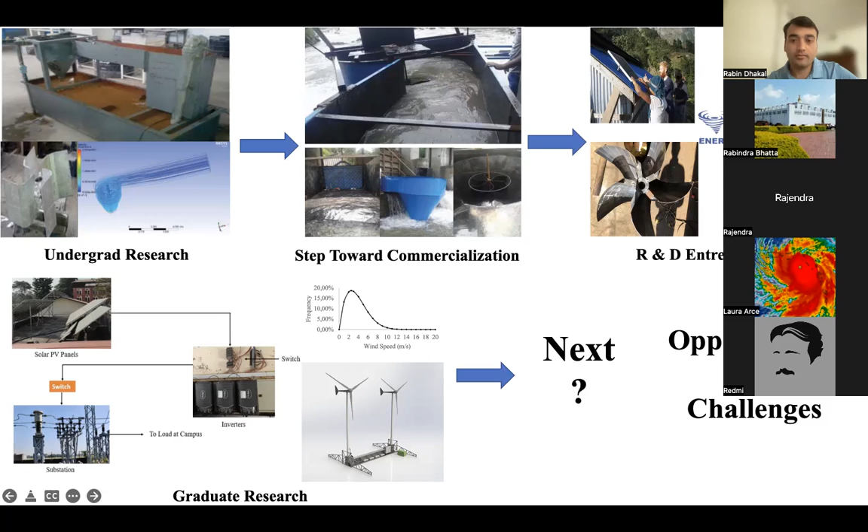Okay, so let's discuss what a micro hydropower system is. This micro hydropower system is also a distributed renewable energy system because it is typically off-grid in nature. We have to form our own transmission line, power and control system, all other things we have to make our own. That's why we can say this is also a distributed renewable energy system.

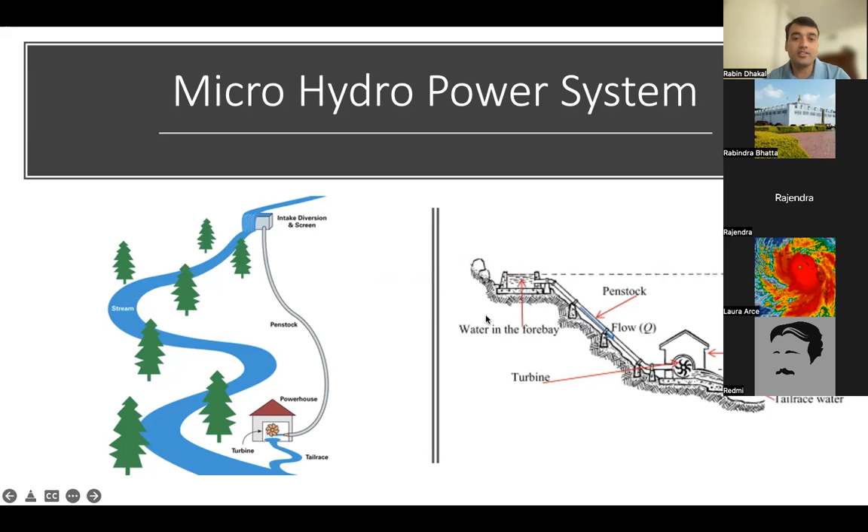So I work on this micro hydropower system, but not what we saw previously.

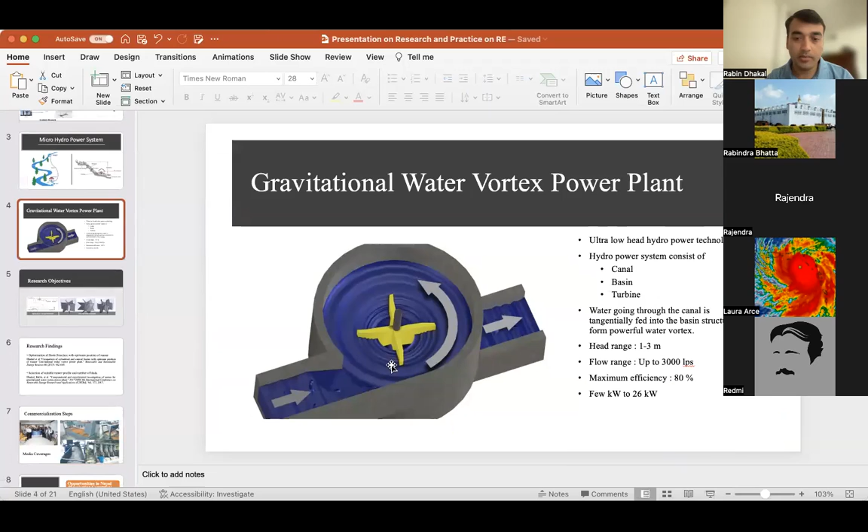Okay, so I work on this gravitational water vortex power plant, which is a micro hydropower system. It is an ultra low head hydropower technology. Typically, micro hydropower systems require head up to 25 meters, up to 100 meters. But for this system, we only require 1 to 3 meters of head.

It consists of canal, basin, and turbine. This round structure is called the basin. And this one, where the water flows, we can say this is the canal.

At the center of the basin there is a turbine. Water going through the canal is tangentially fed into the basin structure so that a water vortex is formed. This vortex is strong enough to rotate the turbine, and we can extract power from this rotating turbine. So here the main source of power is the water vortex, not the head.

Typically in other micro hydropower systems, head is the main source of energy, right? Where if we have some head difference, due to the gravitational force and flow of water, energy would be extracted. We know the common formula rho Q G H, so from that the power is extracted. But here, the main source of power is not the height, it is the water vortex, the strength of the water vortex.

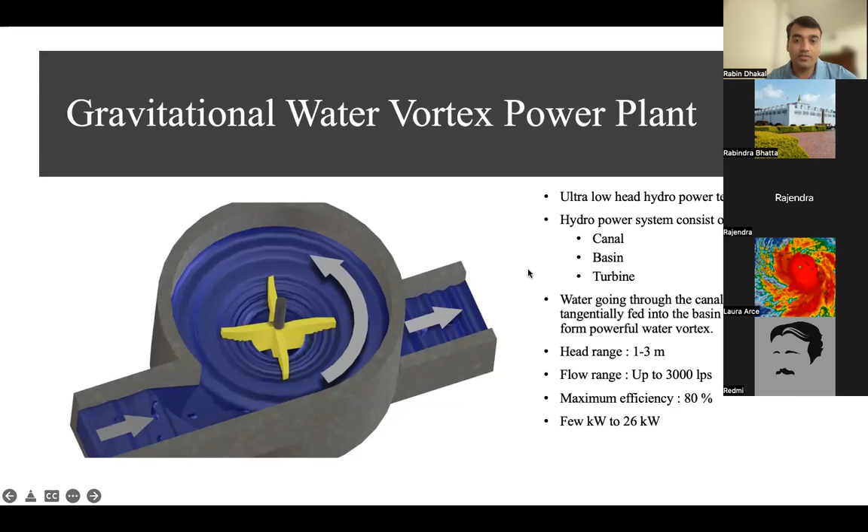So my research objective in my undergrad was to optimize the design parameters of the turbine. Here are some geometrical parameters we can see. The second objective was to select a suitable runner.

This is a new technology, introduced in the world in 2007, so there had not been much research at the time. In 2013, when I worked on this project, there had not been much development in this field. That's why I worked on optimization of design parameters and selection of the suitable runner.

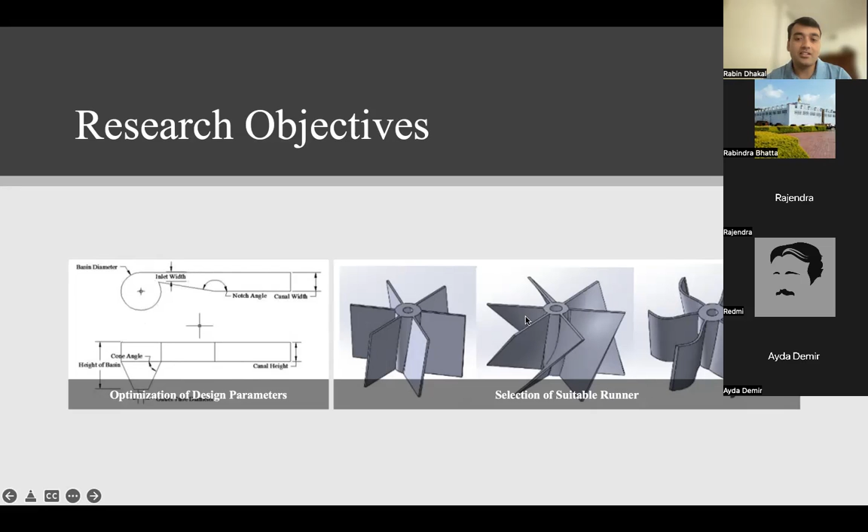The major research findings I made can be found in two of my papers. One is a journal article in Renewable and Sustainable Energy Reviews, and another in a conference paper. In the first paper, I found out...

the optimum basin structure. Previously a cylindrical basin structure was used for production of the water vortex, but I proposed using a conical basin structure for formation of the vortex. This gives much greater vortex strength so we can get more power from the hydropower system.

Another finding in the design is the optimum position of the runner, meaning at what height of the basin the runner should be located. This was also found out and can be seen in this journal article.

The second paper involved computational and experimental study on the runner, different profiles of the runner, and different numbers of blades. From this, I proposed a suitable runner with a curved blade profile having 4 blades.

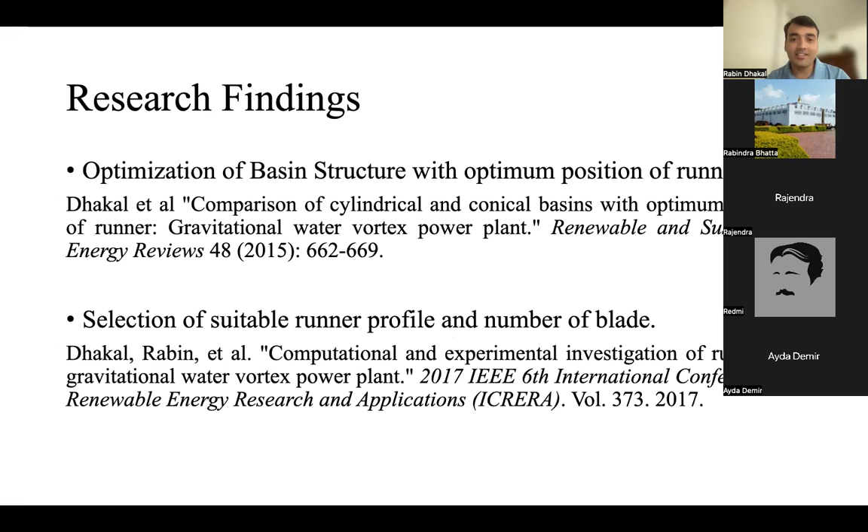I don't want to discuss much technical detail about the computational things, because we are a general audience here, right? So those are the research findings, and after that I had about one year of research experience.

After that I really wanted to commercialize these things because it's new to the world as well, since only a few installations have been made, and those used cylindrical basin structures, while I am proposing the conical basin structure. You can see this conical shape, right?

Previously only cylindrical basins were installed in different parts of the world like Austria and other parts of Europe and Africa. So after I published a few papers, people started believing in the technology, because I published in a really prestigious journal, ranked number 1 in the world, Renewable and Sustainable Energy Reviews. After that I organized a few conferences to disseminate the knowledge I gained through the research.

I also wrote articles in different newspapers and other outlets in Nepal, trying to convince people that we should commercialize it. After a year of this kind of struggle, I got some funding and did a pilot installation of this turbine with 1.6 kilowatts of capacity, which you can see here in a river in the capital city of Nepal. And then I saw that we can extract power from this micro hydropower system.

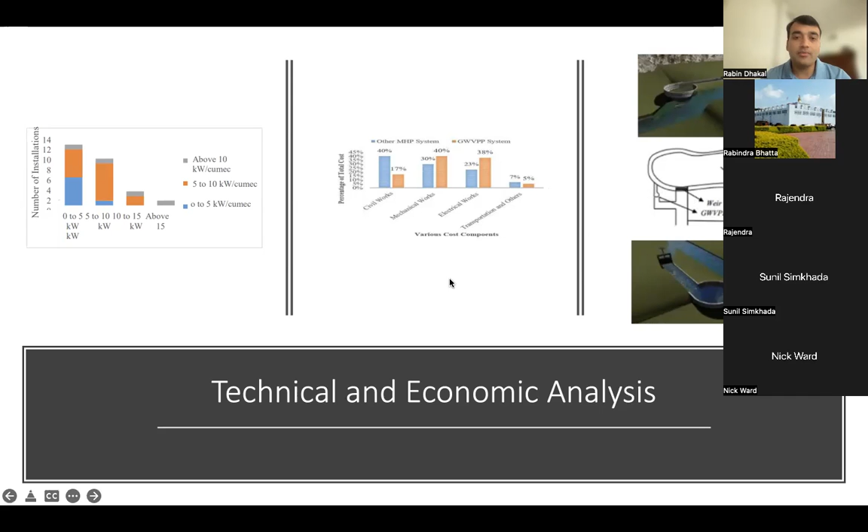In 2018, a South African company invited me to install this turbine in their country. They typically wanted a feasibility study initially, and wanted to develop such projects in different locations of South Africa. So I went there, and what I learned is that in a developed country, like USA or South Africa, which we can call a first world country.

It's a developed country where there's no place lacking electricity or power sources. But the opportunity is that at that time electricity prices increased rapidly in South Africa, and renewable energy sources could compete with the existing energy sources. So that is the opportunity in developed countries, and RE-based systems would be cheaper than the others.

So we did the technical and economic analysis, and concluded that RE-based systems would be cheaper if we could install them. But the main problem is there are few opportunities for RE-based systems. There may be opportunity for solar-based systems, but not wind and hydropower. I only worked in hydropower at that time, so there were very few chances of installing such a turbine, but we had some opportunity there.

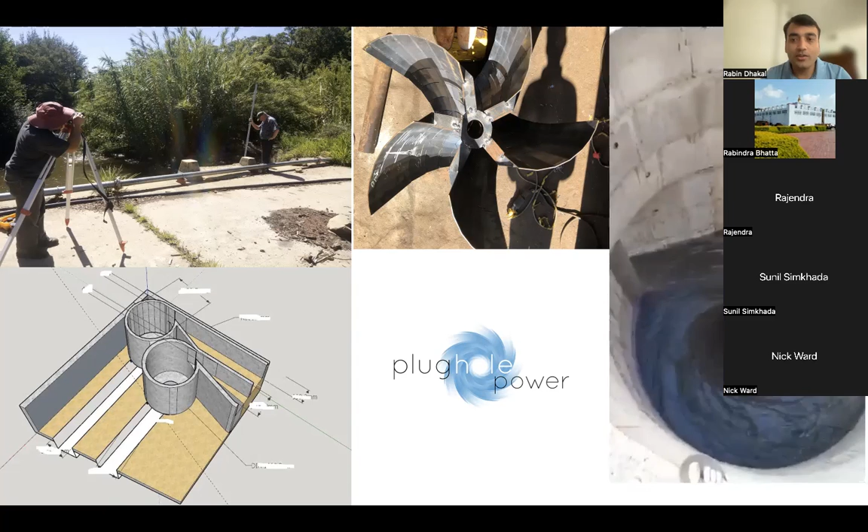From the top, it seems like a conical cylindrical basin, but it was actually a conical basin structure. At the bottom, it's conical, which is why the strength of the vortex is maximum.

I think that project will be in function maybe next month. So that's all about what I did in my undergrad, and after that my 4.5 years of entrepreneurship and R&D journey in Nepal and other parts of the world.

After that, in 2019 I came to the United States and started working on different research. I wanted to continue my research in distributed renewable energy systems, so I collaborated with NWI, the National Wind Institute, and Reese Technology Center, where they have some microgrid facilities.

In graduate study I worked on different solar power systems. I conducted technical and economic evaluations of installing solar PV systems to make an educational building a net zero educational building, and I also worked on different wind power systems.

Here we can see this Weibull distribution curve. I worked on different wind power systems, like resource assessment of wind power systems, and I also applied different machine learning techniques. This is an LSTM network, and I implemented different machine learning algorithms in wind resource assessment and wind power production.

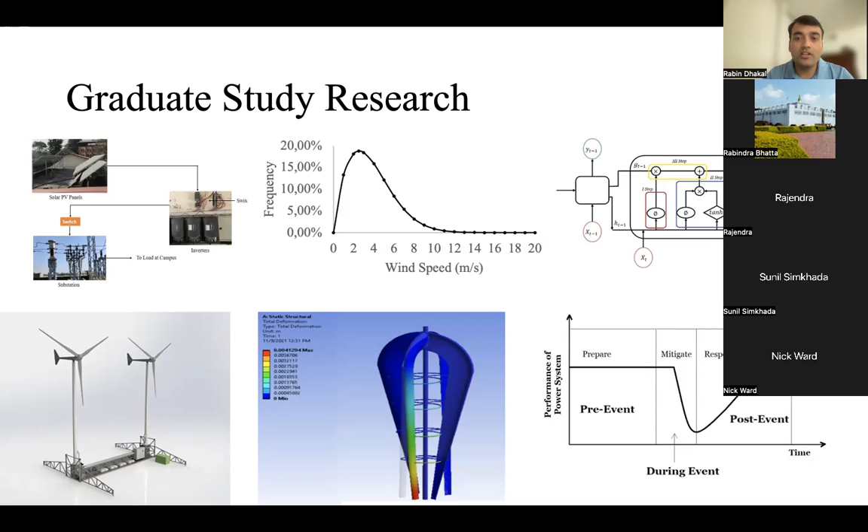So given the chances of power cutoff, we have to mitigate it and respond to the power outage, and supply some kind of emergency power before and after power is fully restored from the typical grid supply system. During that time we can take advantage of this distributed energy system to make power readily available during that event as well. So I started working on it during my master's.

So I have already discussed, we have to prepare for the event because hurricanes are most common in Texas. We have to prepare for whenever the hurricane will happen, and we have to supply some kinds of power to the grid, or maybe to the affected households. During this event, in this marked time, we can supply the power through such a mobile wind turbine unit. So this is the concept.

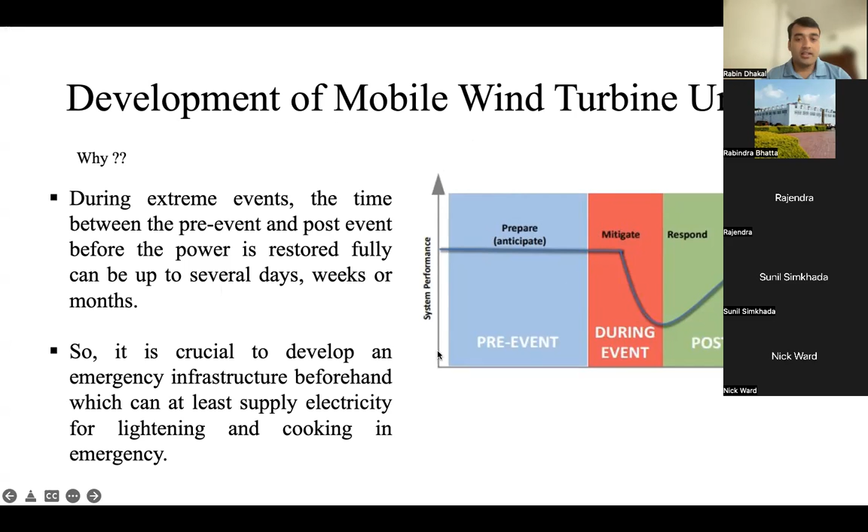While talking about practice, the use of renewable energy resources is not very common. Why is it not very common? Because usually fossil fuel generators are used, since we can transport those fossil fuel generators easily. Another thing is renewable energy resources are not stable, and static, so we cannot transport that stuff. We could have a solar PV system, but it will not work at night time or maybe another time. Wind is not that much feasible in such locations.

But we try to make the mobile wind turbine unit, and we try to utilize only a height of 10 meters, so that we can make the wind turbine structure mobile. So the ground structure of the wind turbine system would not be that robust, so that we can install that turbine in a truck, and then we can go to the place where there is a hurricane or maybe earthquake or any other extreme event, and we can supply power to the community. So this is the concept.

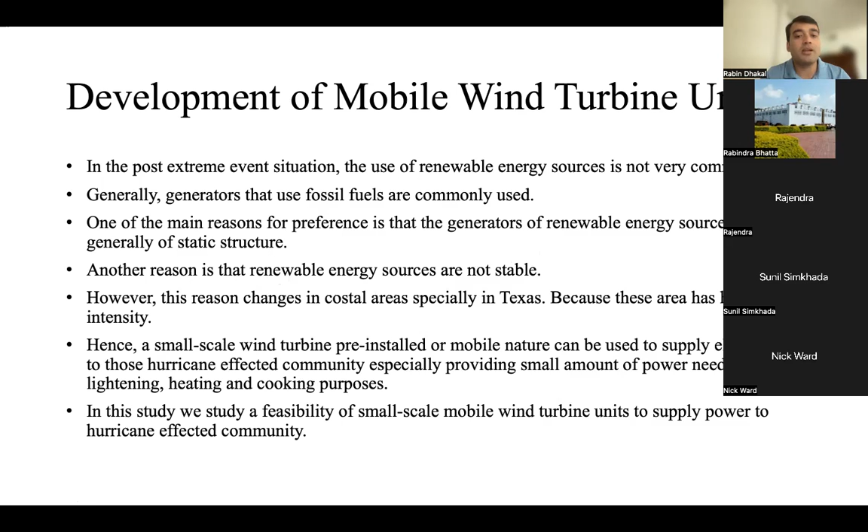Yeah, I have already discussed the ground structure should be less.

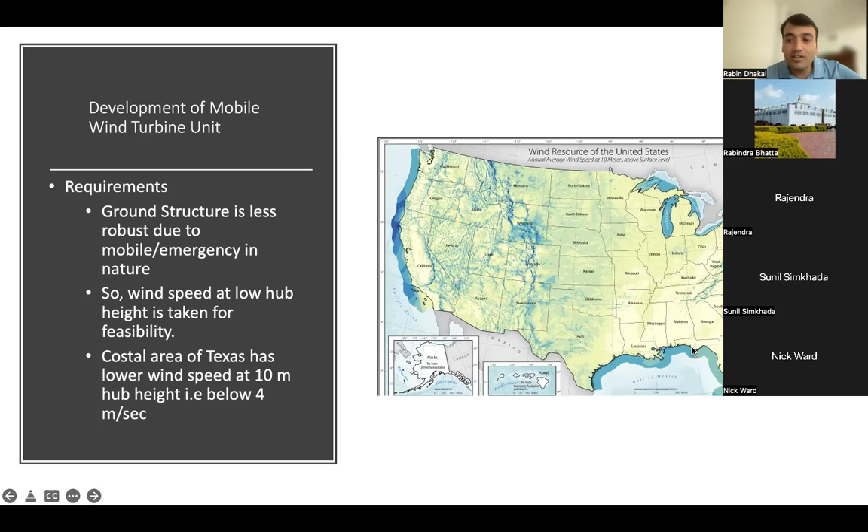Okay, thank you Rabindra. So yeah, the ground structure should be less, and it should be mobile or emergency in nature, and we can only get power from a low hub height, because if we want to go to a high hub height, we have to make the ground structure very robust, right? So we can see in Texas it would be like only 3 to 4 meters per second.

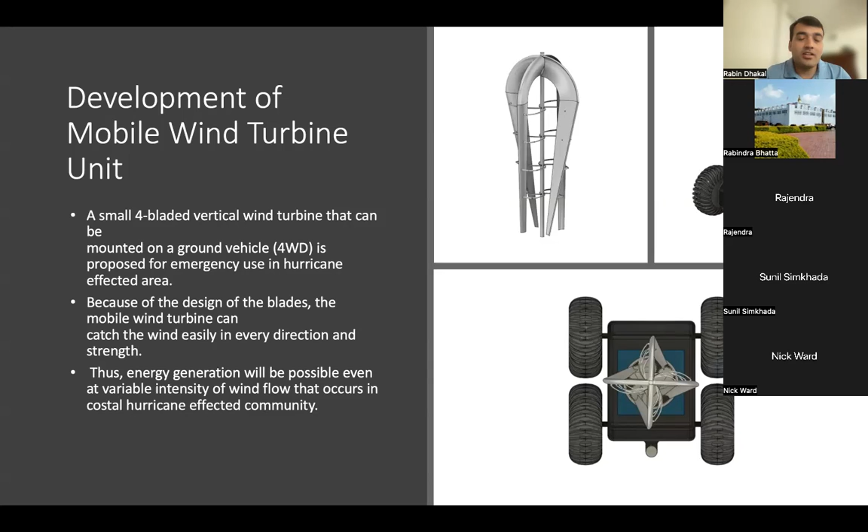So for these types of systems, unlike the horizontal axis wind turbine, we propose to use the vertical axis wind turbine like this, because we are only working on a height of 8 to 10 meters. Vertical axis wind turbines can be more mobile than horizontal axis wind turbines. So we propose this, and we are working on it, and we are also trying to get one prototype model at Reese Technology Center, and this can be feasible in supplying power during emergencies.

Okay, so what are the opportunities and challenges in USA? I'm talking about the USA now. There are lots of opportunities for these types of distributed renewable energy systems, because it is cost effective in many areas in the USA in terms of solar PV panels and some small scale wind turbine systems, and for some businesses as well. It is cost effective compared to the energy which they get from the grid.

Also, the government and state level governments are advancing policies to encourage the development of such distributed renewable energy systems, and they are also providing some kinds of tax benefits and other stuff to promote it. So that we can also consider as opportunities. And also, as I discussed, during power outages, applying these kinds of distributed renewable energy generation makes the grid system more resilient, and it will also have more security during that time. So these are the opportunities of distributed renewable energy systems in the USA.

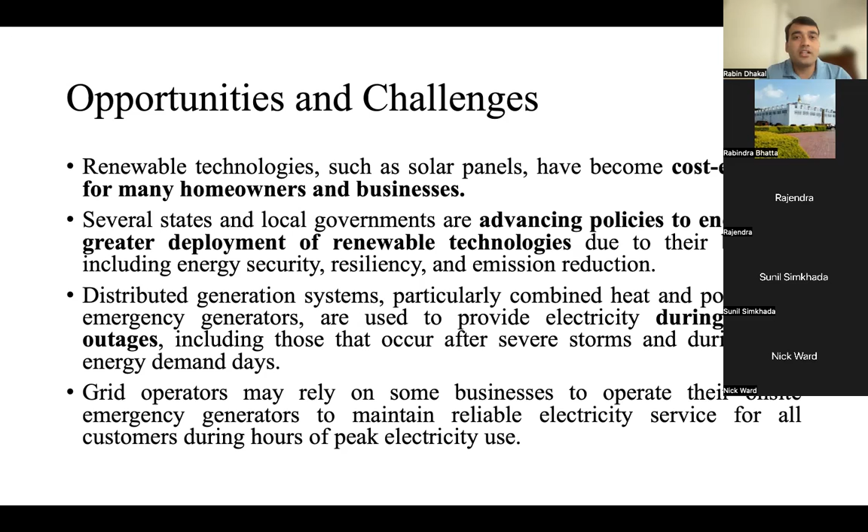Also, if we have a typical organization or educational building, we can make it a net zero building without using any other power sources from the grid. So that is also another opportunity. There is much research going on, such as making buildings net zero, and such kinds of work we can do in the distributed renewable energy field.